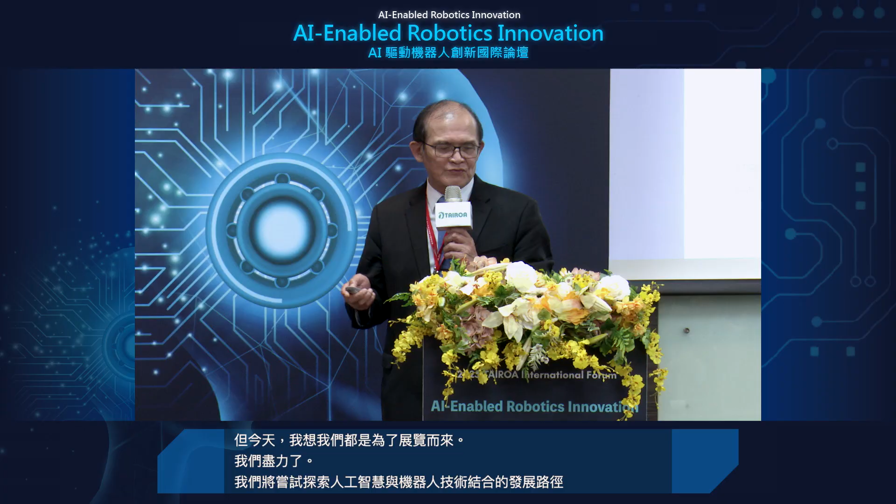Okay, I shouldn't speak too much because we have excellent experts today that will share their thoughts about AI robotics. But today, I think we are all here with the exhibition. We will try to find out what is the growing path of AI combined with robotics. So here are my two cents of ideas, and I want to share with you.

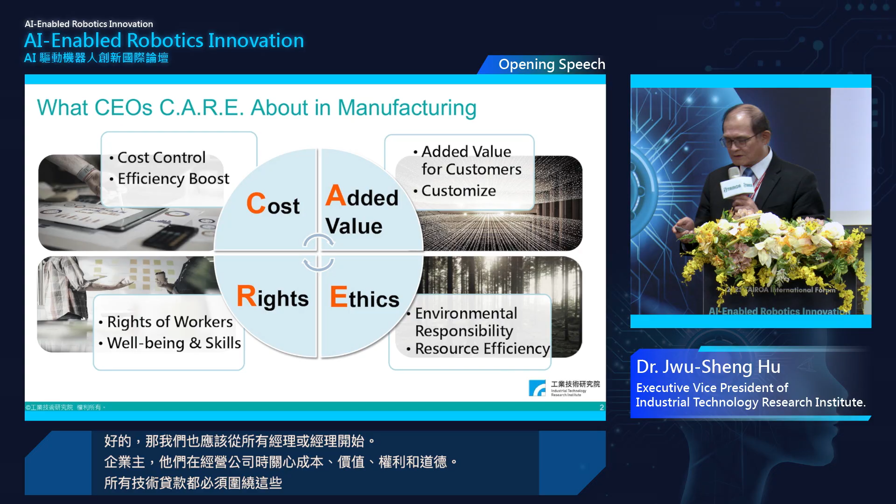Okay, so we should start also from what all the managers or corporate owners, they concerned about the cost, added value, rights, and ethics when they run the company. And all the technology landing has to circle around all those objectives, okay? But in the past 10 to 15 or 20 years, digitization has already

entered our society and also a lot of industries. So if you look at from the left-hand side, the supply chain all down the way to customer relationship or the CRM, all these steps have been digitized a lot. Of course, there are a lot of companies still trying to make the digitization or a lot of information technology enter the company to help.

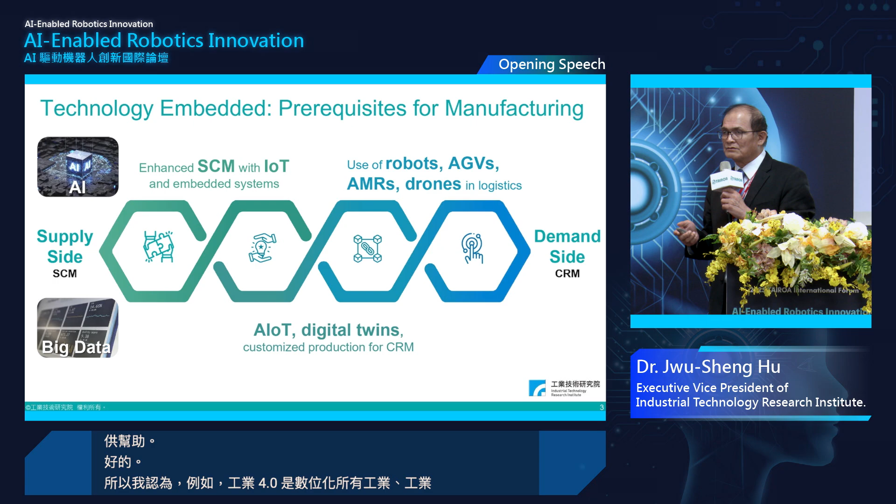Okay, so I think that, for example, Industry 4.0 is one of the ideas of digitizing all the industrial activities. However, what we are facing today is the last mile, what I say the workforce resilience, okay? Many of the activities are still handled by humans, okay? But we will have an aging society, and of course in Taiwan, we have decreased newborn babies. So how are we going to maintain the economic growth? So that is the main concern, okay?

But how do we fill the gap of this workforce shortage? I think in the past, a lot of automation technology already told us that we can replace human or help humans in a lot of activities, like in the industry, in the factory, when handling heavy objects. Then we can use a very big robot, okay, to handle all the, for example, automotive industry tasks. Okay, so a lot of automation technology already entered our manufacturing or even the service domain, but that's not enough.

Okay, on the right-hand side, you can see what is the demand. These demands are still unfulfilled. First one is skill-intensive manual task. We still rely on a lot of manual skills to produce a product that we want, and those skills are owned by some person, and those persons become older and older, and nobody is willing to take over these skills. The second one is environmental adaptability.

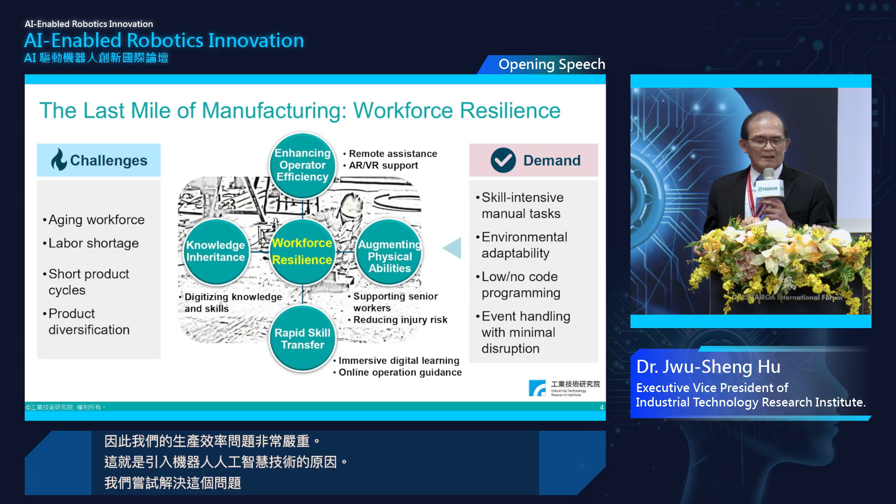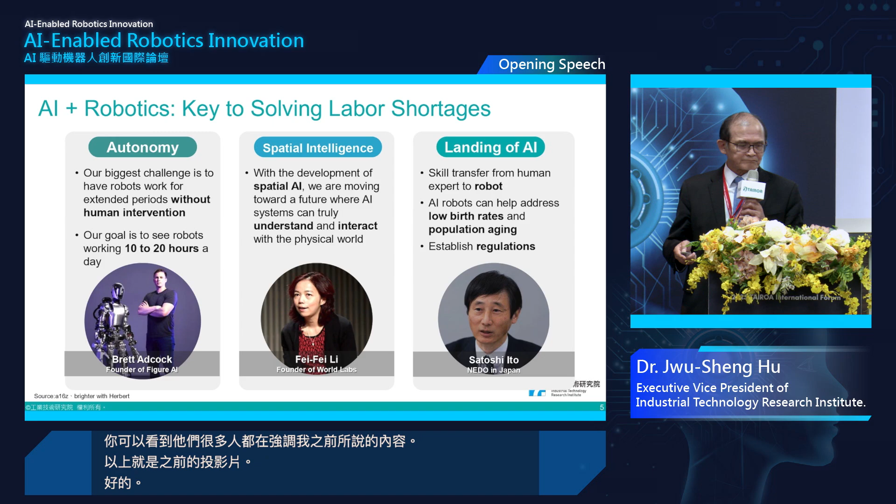So that's why the AI technology introduced with the robot, we try to solve this problem and give a better production or service environment. I think a lot of experts, at least here, and not all, but many experts already in their speech or in their articles, you can see a lot of them emphasize what I said above in the previous slides, okay? And later on, I will introduce some of them.

But of course, we have the objective, and we know what we are going to do. But there are still a lot of technical difficulties, okay? AI is one of the, I would say, they shed us light. You see, we follow the path. Maybe we can solve all the problems we concern about a lot, okay?

And so previously, we have a lot of industrial robot arms, collaborative robots, and they introduced a lot into our industry. But most of them are designed for simple and repetitive tasks. They can do things very well if they are repeated with precision, with speed. They are doing very well, okay? And gradually, you can go to the right-hand side.

What we are trying to solve is, as I said in the previous slide, we are not targeting those repetitive tasks. We are targeting flexible and complex tasks. So we need more intelligent robotics with a lot of degrees of freedom. For example, humanoid robots, multi-legged robots, so they can adapt and maneuver easily in our natural environment. Combined with AI, this may be the way we solve all the problems we face.

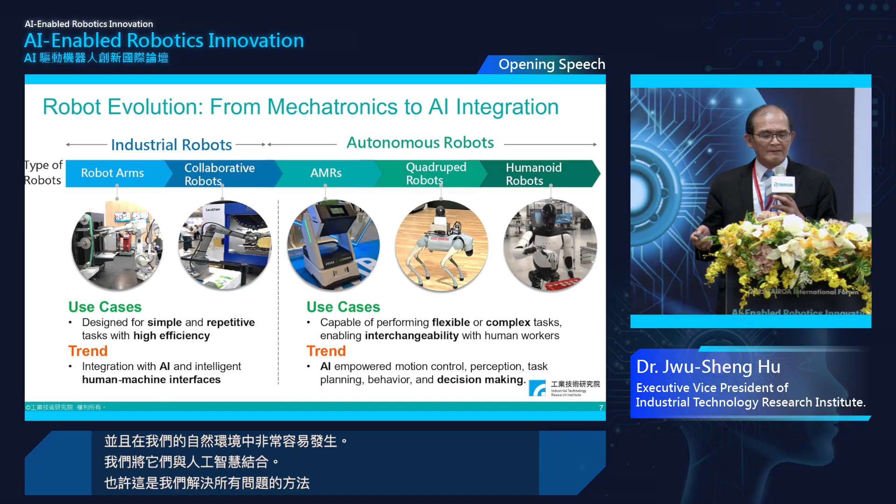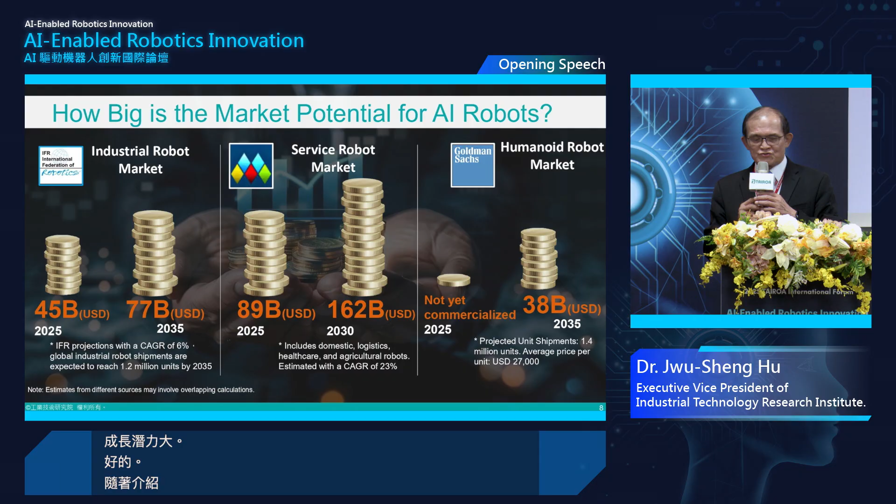There are a lot of market trends, I won't go into detail, but people say this is a very promising industry. AI robotics, not only the new type of robot but the traditional industrial robot and current service robots, the growing potential is huge, with the introduction of AI to solve problems.

The fundamental difference of AI robotics from previous robots is autonomy and automation. When we try to do things, we first come up with an objective, then we have to have an action plan, then we execute it. Previously, in automation, the action plan was designed by humans. You program the robot with a repetitive path, and the robot repeats the task many, many times with very high precision.

But the first step in the introduction of AI is that the robot will plan itself. It means the robot will have the action plan. For example, automation task generation, robot workflow planning, path planning, control programming, or mapping the environment, localizing and navigating around it.

Scene understanding - for example, when you see things, oh, this is a chair, I can move the chair. This type of understanding, object recognition, grasping and manipulation - there are a lot of companies focused on this area right now, so that when the robot does things, it doesn't need to be programmed.

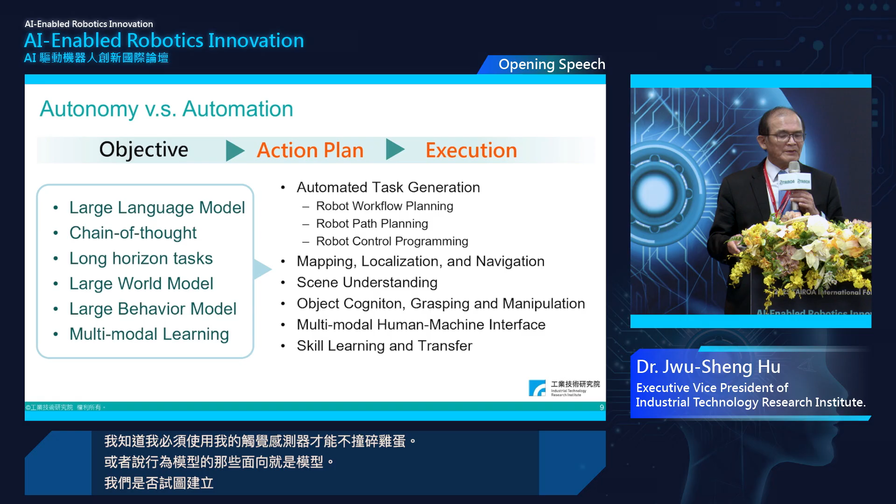There are a lot of architectures that will structure the future of the robot, for example, mimicking the human - we have a brain and a cerebellum. The brain is doing the logic thinking, inference, understanding the world, processing our information. But we have a cerebellum that has to control our body to come up with appropriate action to achieve a goal.

So recently, if you see the development of China's robots, they focus a lot on the cerebellum - so the robot can dance, the robot can do boxing, whatever. They use AI to train their cerebellum.

So there are a lot of challenges in trying to build this cerebellum and the brain. But from my understanding, the technology to build the cerebellum is more or less mature right now. Maybe 2 or 3 years later, you can easily train a multi-link robot to do a lot of actions. However, the brain technology is very, very difficult. Just like I said, what is the world? How do we build the world, the idea of the world, for the robot? And how do we equip the robot with the behavior that can accomplish a lot of the work we are doing right now?

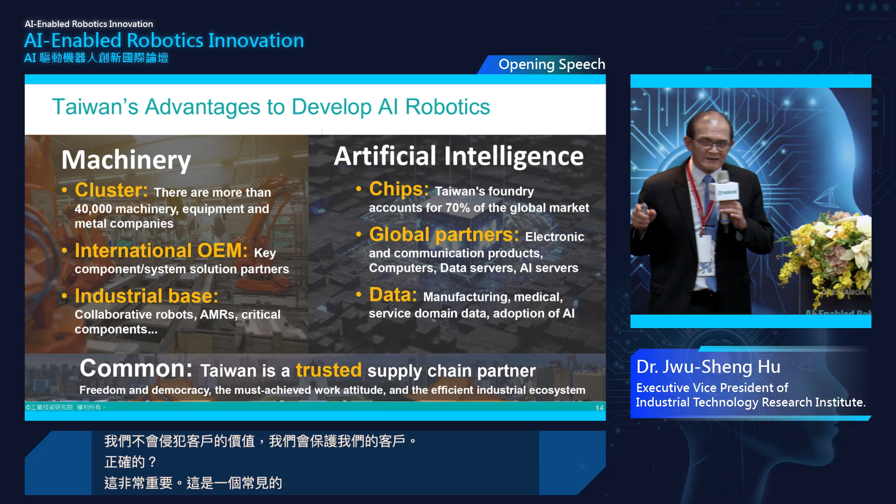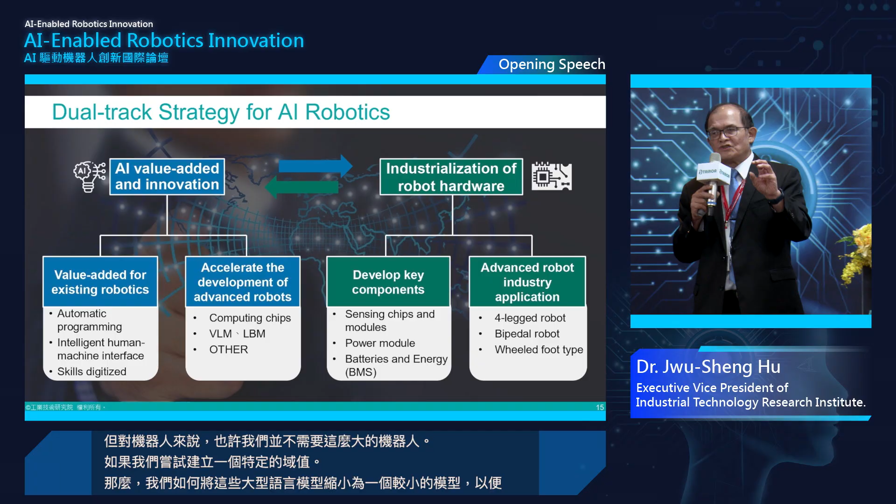Because to build an AI model like a ChatGPT or large language model would require a huge amount of resources. But for robots, maybe we do not need such a large model if we try to create specific domain values. So how do we reduce those large language models into a smaller one that can achieve the goal we're trying to do? This is one direction of dealing with AI.

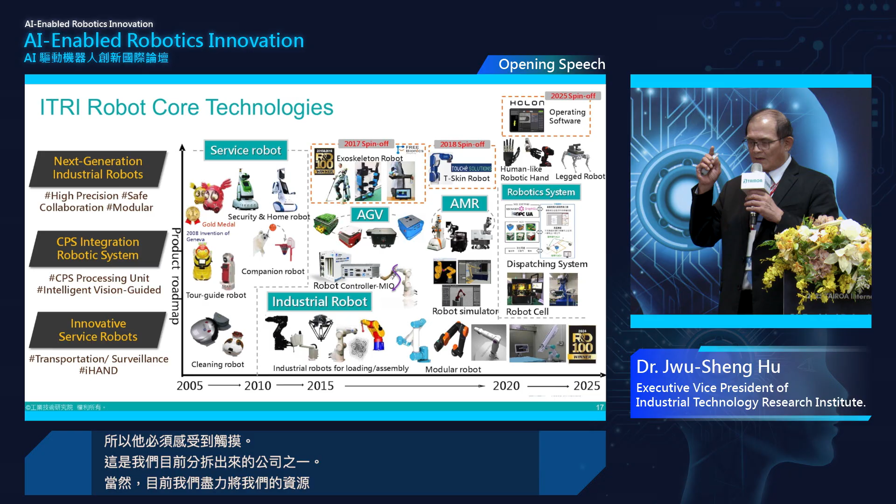So this is one of the companies that we spun off. Currently we put a lot of resources into how to put AI into robotics, as I said.

So these are the solutions. I don't want to display too much detail, but the first one, on the left-hand side, is a robot cell controller that will introduce AI into the box. The box will coordinate the robot and the machines surrounding it with the robot controller.

And how do we handle the workpiece? And how do we simulate either the service or manufacturing environment? And how do we equip the robot with skill?

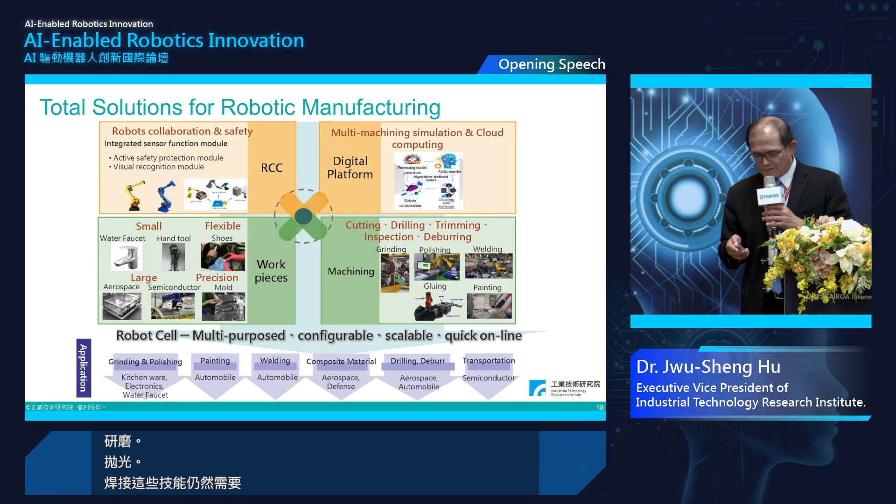Currently our focus is on industrial practices like grinding, polishing, welding. Those are skills that still require humans, but we cannot find the workforce right now because of the aging society.

I don't know if I can make this work. This is some video.

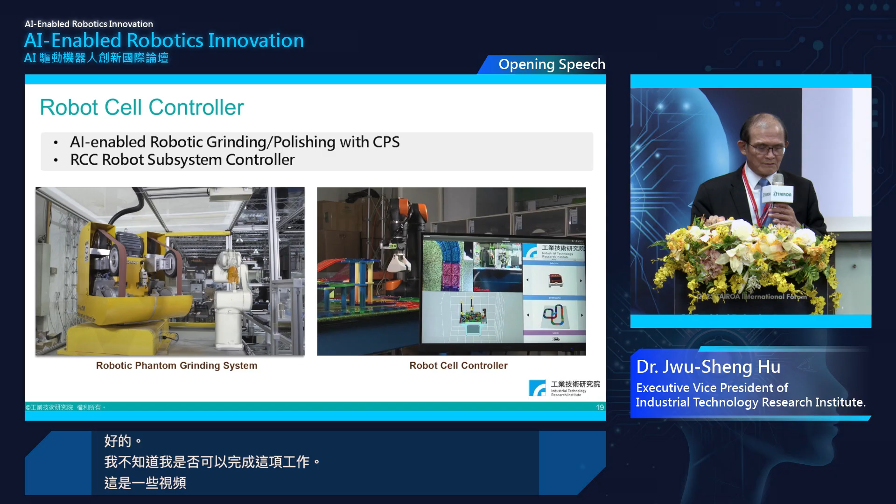This was done several years ago. On the left-hand side, you can see a phantom robot. Oh, 5 minutes left. Okay, phantom robot.

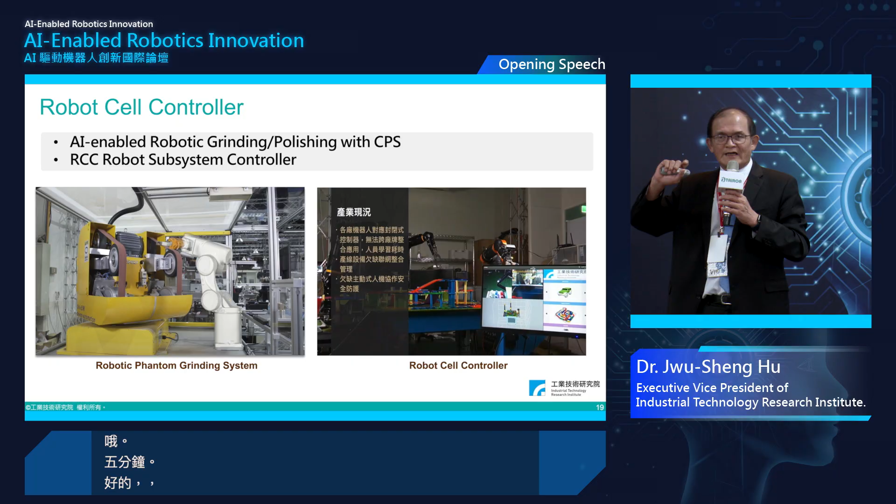So this is like a digital twin. In cyberspace, we can practice all the simulations and task planning for the robot, and it will map to the real robot. This is what people are trying to do currently.

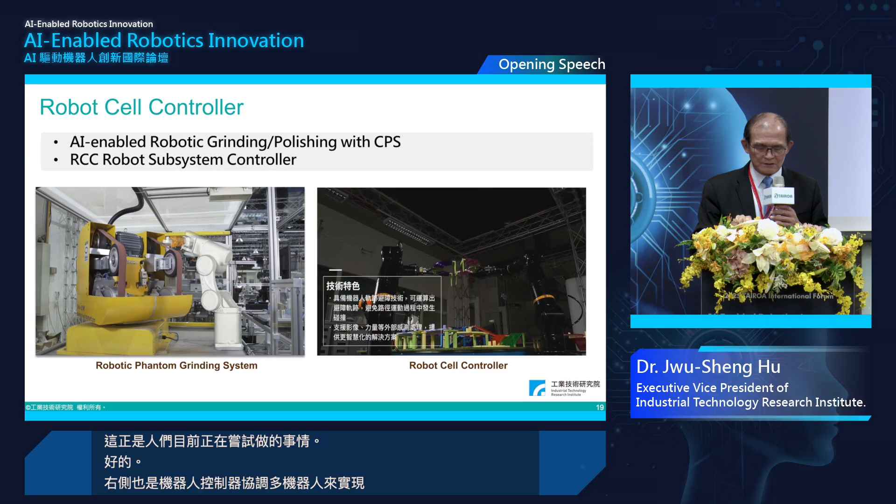The right-hand side is also the robot cell controller, coordinating multiple robots to achieve the same task. And for AMR, there are a lot of applications in either factories or even convenience stores.

This is a robot that we collaborate with a convenience store on, but currently we are trying to see if this robot can be introduced into convenience stores, because there's also a lack of human resources in a lot of our convenience stores.

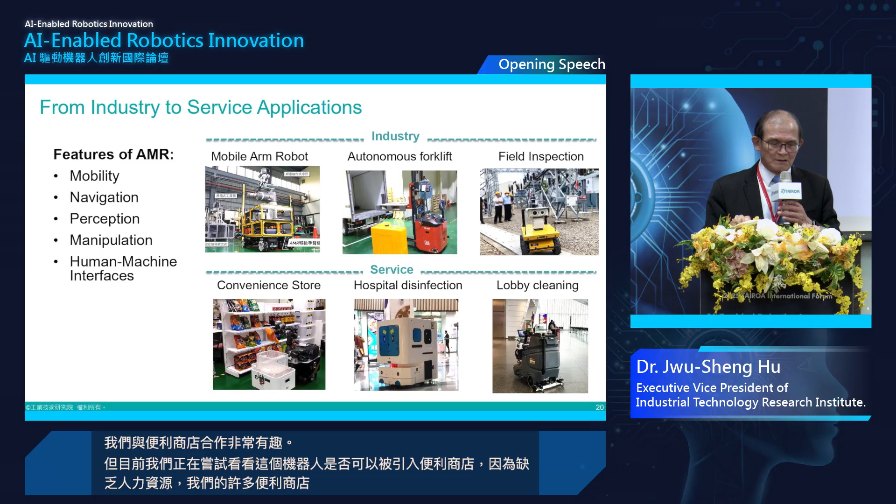This is the hand that we developed several years ago, and we are trying to make a second generation of our robot hand.

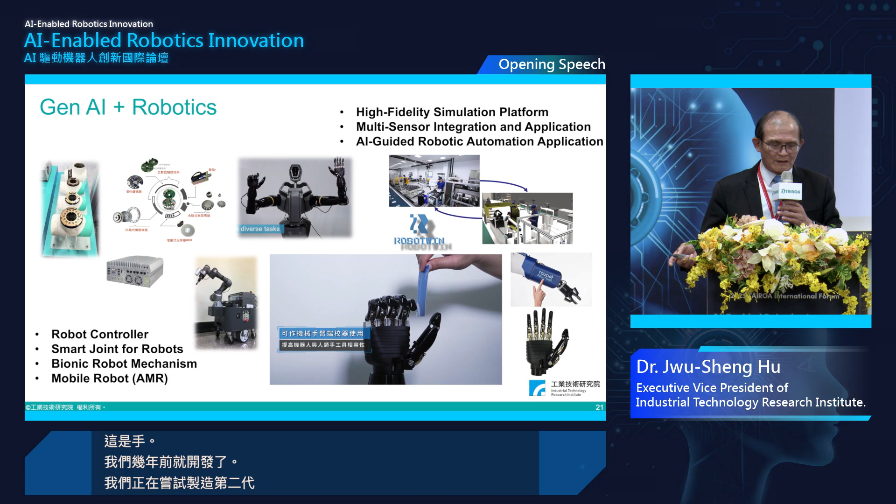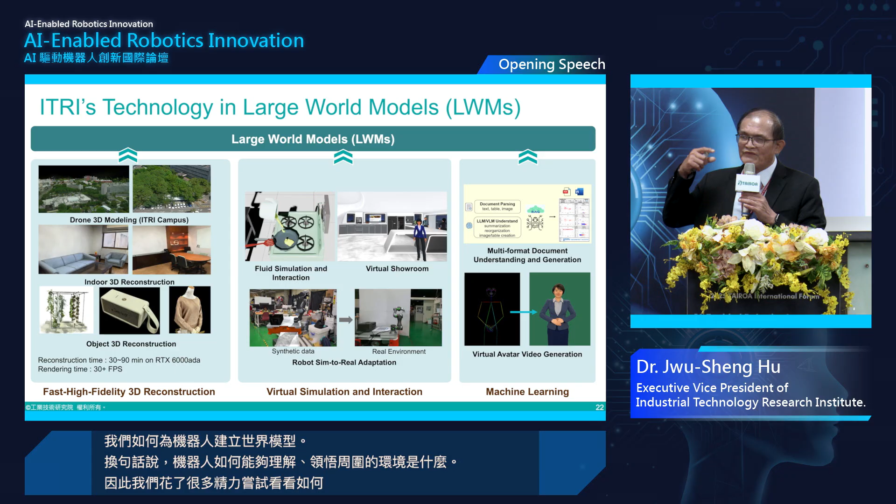As I mentioned, one of the most important technologies is how do we establish the world model for the robot. In other words, how can the robot understand and comprehend its surrounding environment. So we spend a lot of effort trying to figure out how to generate this large world model. I will show you the video because I don't have time.

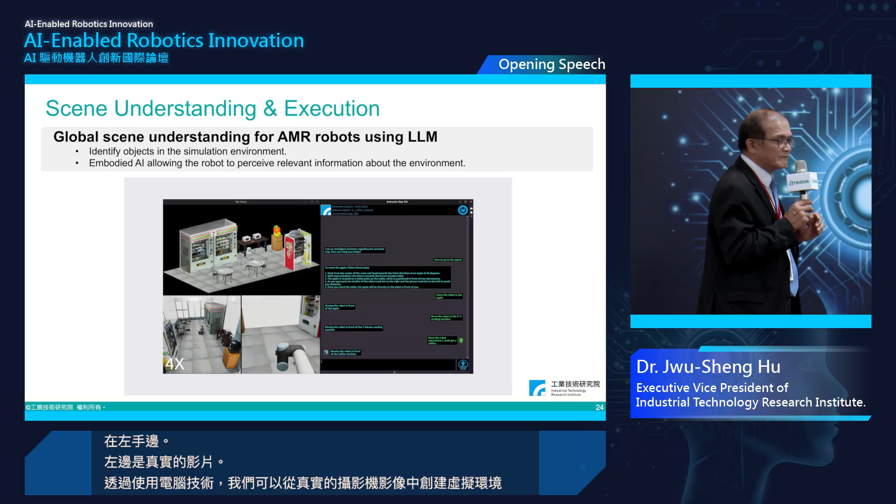There's no sound, I'll explain. On the left-hand side is the real video. Using computer technology, from the real camera image we produce a virtual environment. The virtual environment maps to the real environment. One interesting thing is that in the environment you see a microwave, but from the video image you can only see a box.

But when you introduce it into cyberspace, we have to tell the robot that this is a microwave oven and that it can be opened. Okay, and that's what we call a world model. We try to establish the world model.

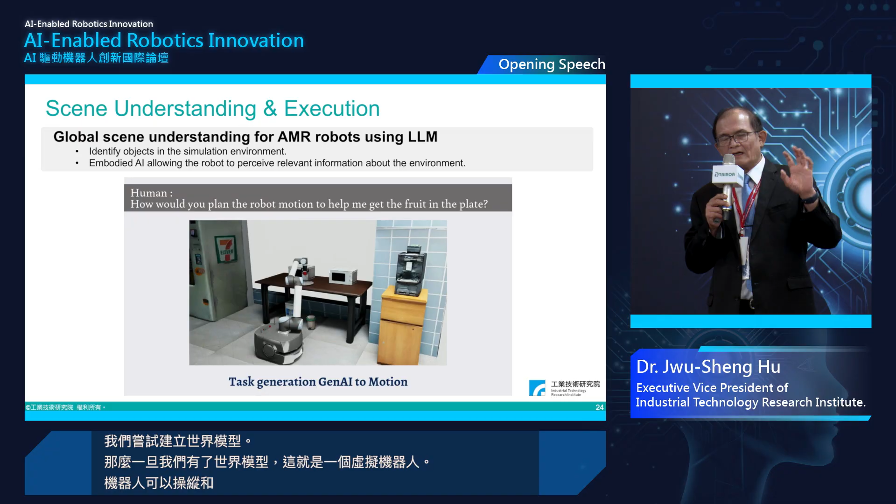Then once we have the world model, this is a virtual robot. The robot can manipulate and navigate around the virtual environment and accomplish the task we assign. And it can even learn how to do that.

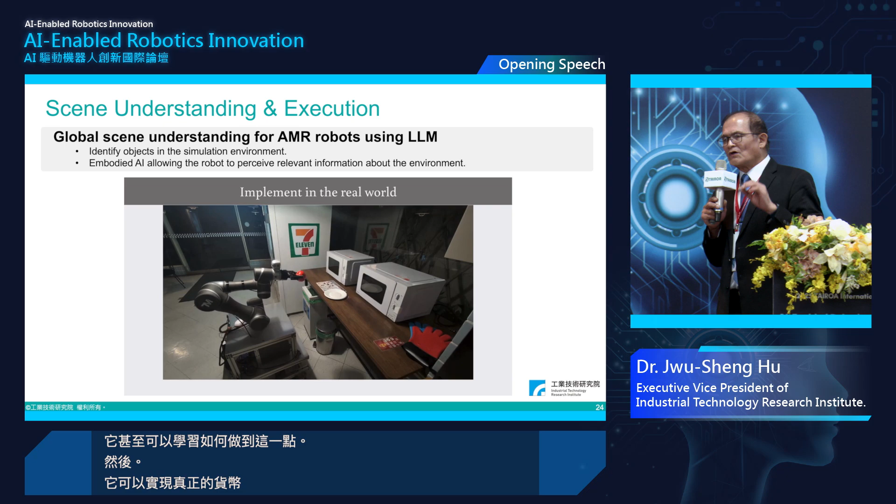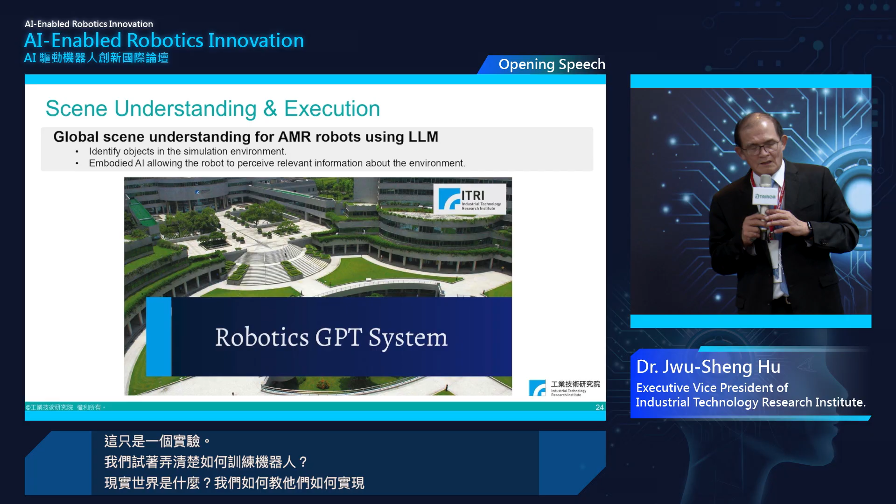Then they can implement it in the real world. This is only an experiment. We try to figure out how do we teach the robot what the real world is, and how do we teach them to accomplish tasks in the virtual environment.

Okay, so this pretty much covers my thoughts. I hope this is good enough for you to understand. Thank you.